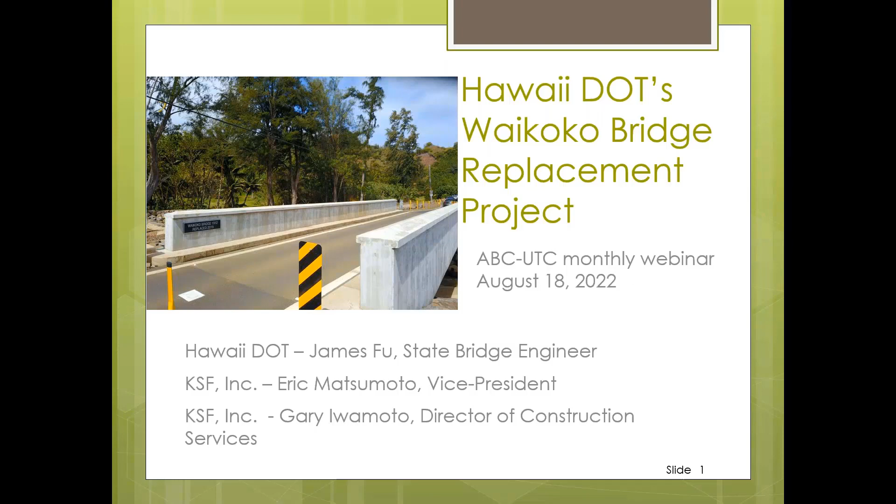Hawaii currently has about 1,360 bridges in the state. The average age of our bridges is nearly 70 years old. For your information, the Hawaii DOT Bridge Design Office is managing many programs in our state, such as the Bridge Seismic Retrofit Program. We are managing the Bridge Load Rating Program, where we must meet a federal mandate to load rate all of our bridges for SHVs by December 31st, 2022. We are also managing a Bridge Crash Testing Program, where we are crash testing our custom Hawaii bridge rails per MASH 2016.

We're also replacing many of our destination sign support structures. One of our main things we're doing is managing our Bridge Asset Management Program, where we must meet transportation asset management goals of 20% good bridges and 2% poor bridges. One of our critical tasks is to address critical bridge findings.

Hawaii has a unique situation from other states because our highways wrap around the island like this, and it's usually called a belt road system. For most cases, because of this belt road system, if a highway is closed for some reason, residents must use an alternate route, and most times they need to drive great distances to get to their destination.

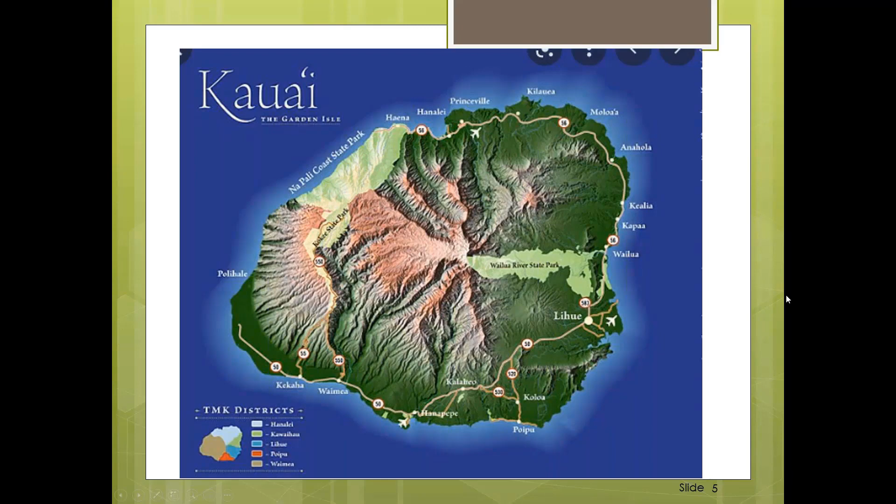Back in April 2018, there was a huge rainstorm on the north shore of Kauai. Heavy rains occurred between April 14th and 16th of 2018, which set a national record of 49.69 inches of rain in a 24-hour period of time. The previous Hawaii record was 38 inches. These heavy rains created many landslides on the north shore of Kauai, which closed the highway.

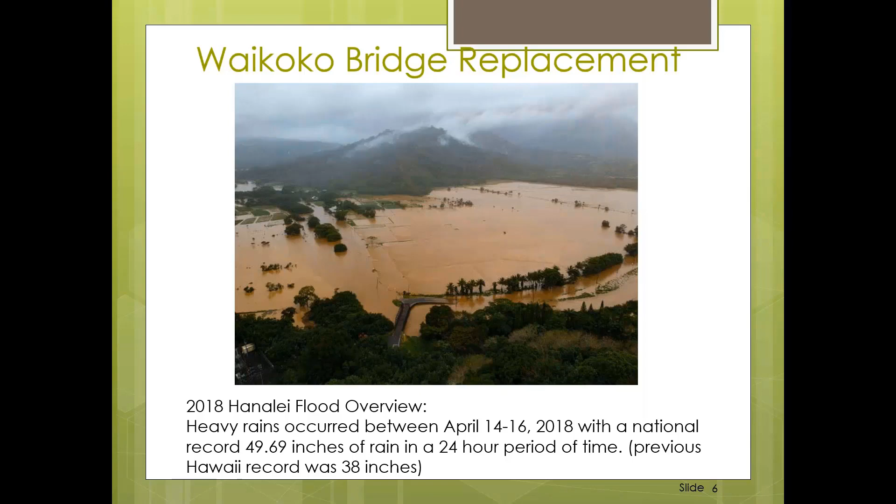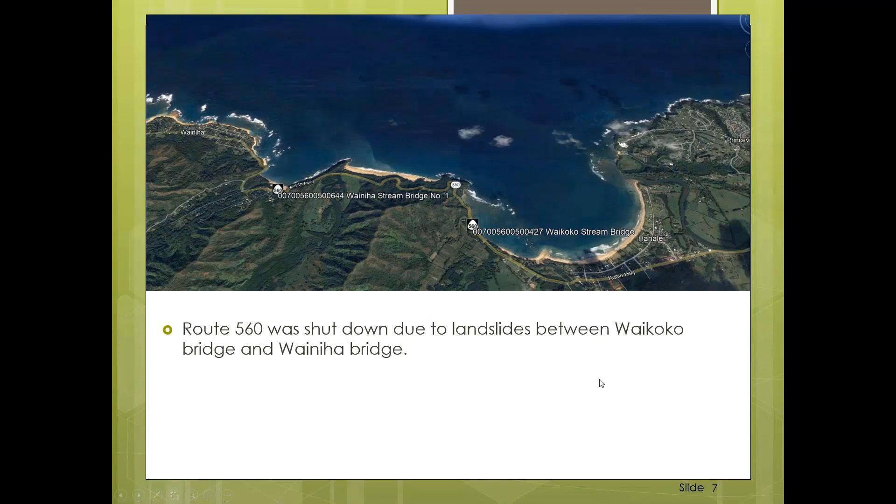Route 560 along here was shut down due to landslides between Waikoko and Wainiha. That's Wainiha there. As I mentioned, to get into this area, Route 560 is the only access to Wainiha and Haena.

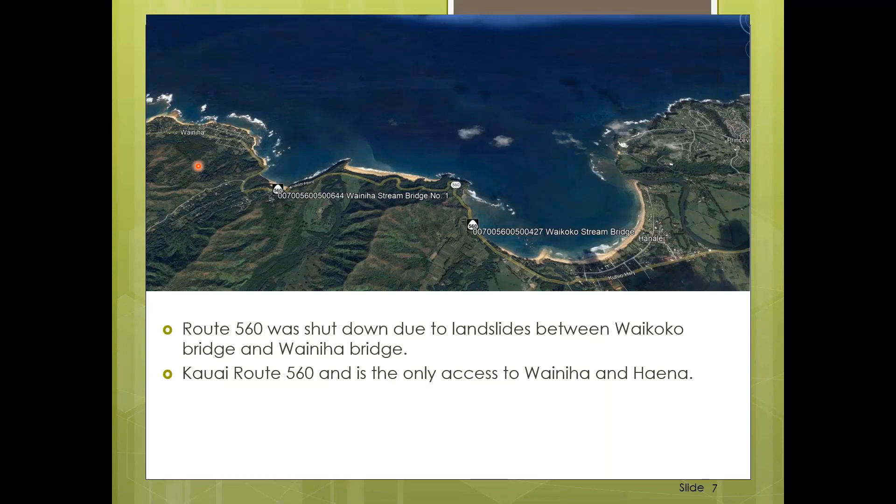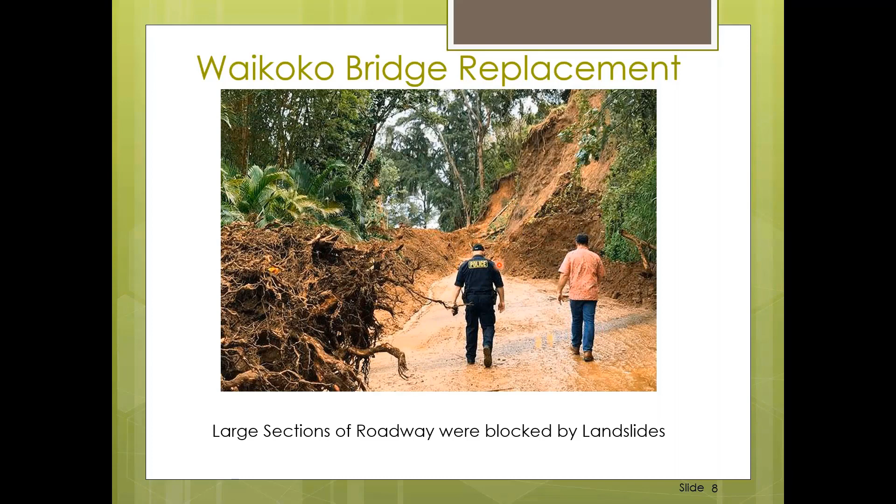Traffic was slowly opened to one-lane traffic after a few weeks. Here we're showing large sections of the roadway were blocked by multiple landslides, and large sections of Route 560 were literally washed away.

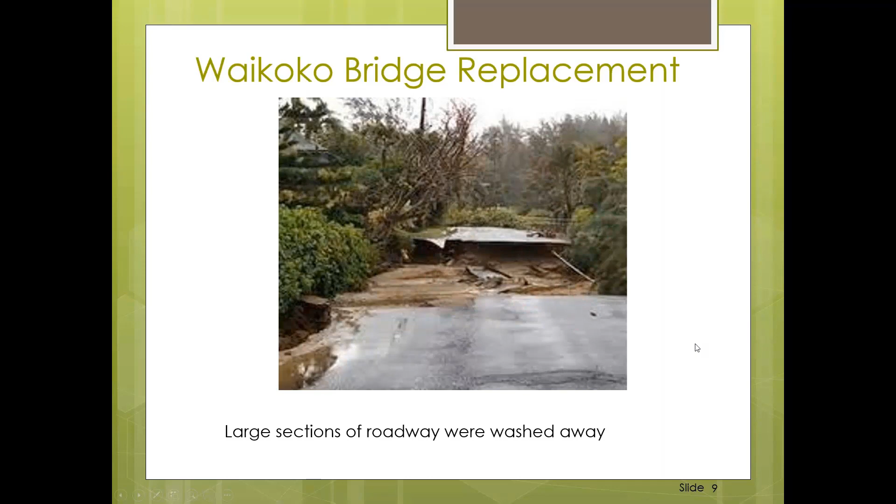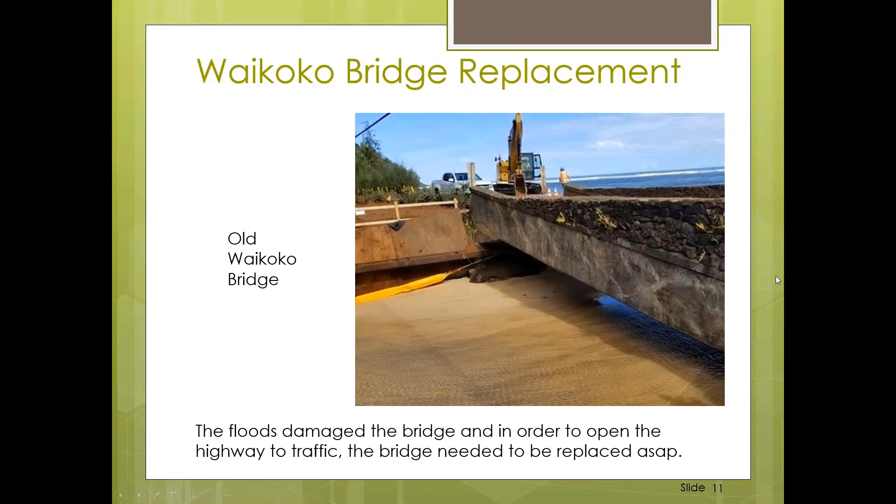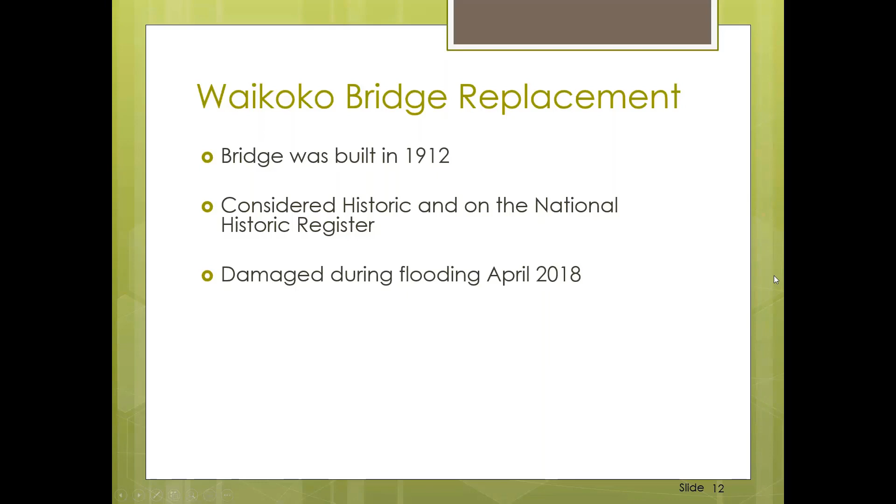The Waikoko Bridge was built in 1912. It is considered historic and on the National Historic Register. As I said, it was damaged during the flooding of April 2018. Hawaii DOT decided to replace the bridge after reviewing the option to construct it with a full highway closure for one weekend.

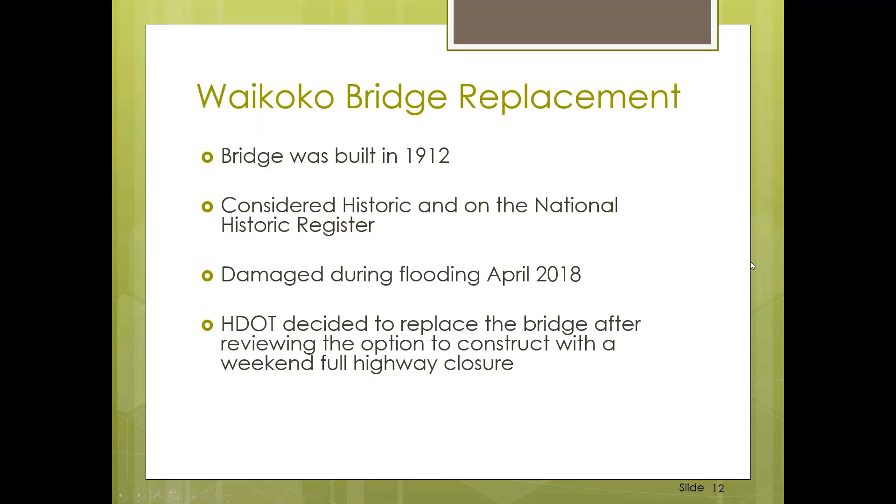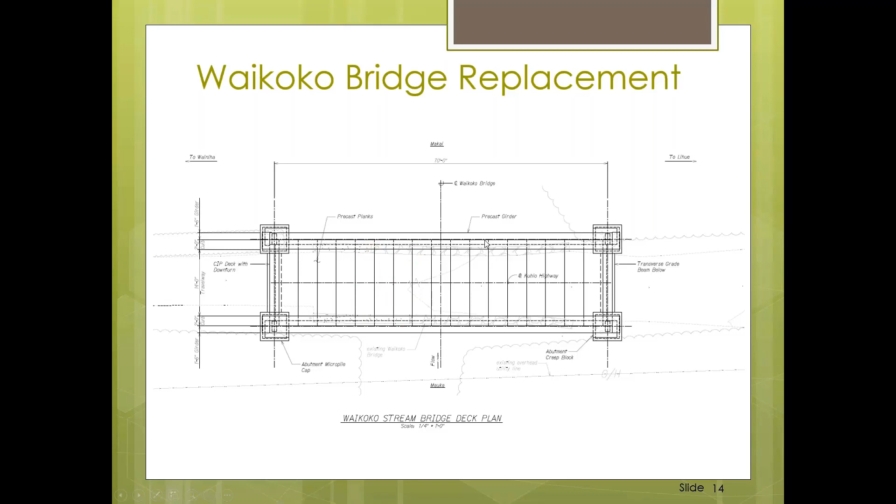This is a plan view of the replacement bridge. This bridge is a one-lane simple span bridge, and it's hard to see here, but it's 70 feet long. We'll go over the construction sequence later, but note that there were micropiles installed at the 4 corners of the bridge. The abutment pile caps were then connected with a transverse grade beam here and here to connect the two pile caps. The bridge girders were actually the bridge railings, and they were L-shaped, as I'll show you later. After the girders were placed, transverse precast concrete planks, shown here, were placed and supported by the bridge girders.

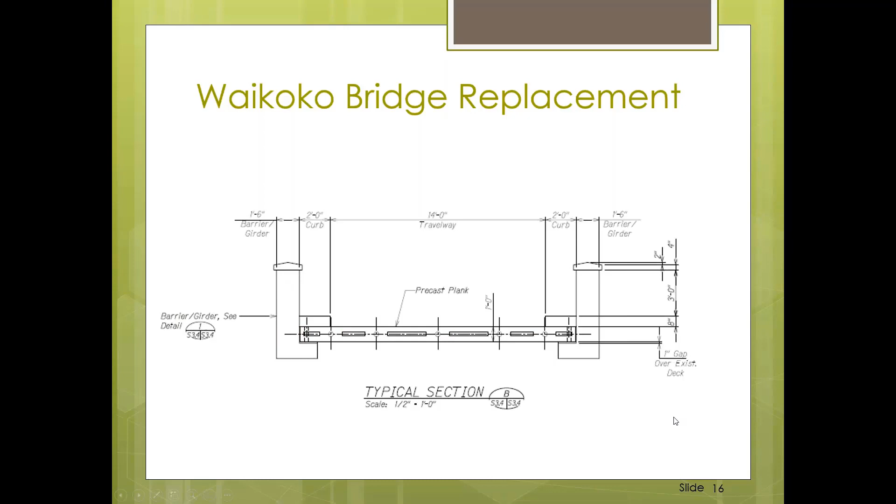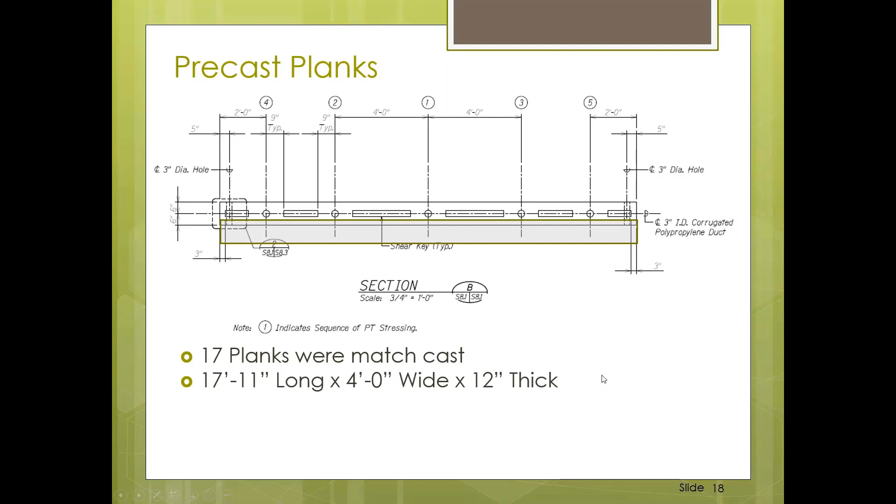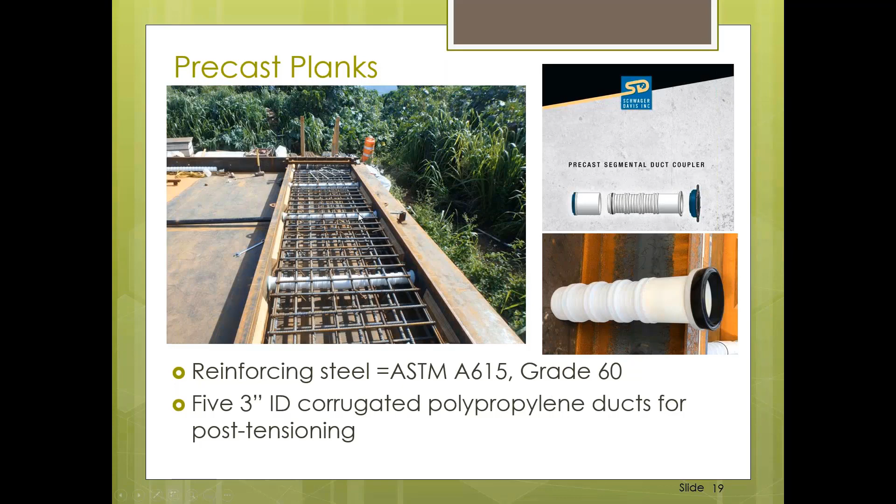The reinforcing steel for the precast planks were grade 60. There were 5 corrugated polypropylene ducts for the post-tensioning. As you can see here, the white tubes are the post-tensioning ducts. And then also at the ends of the plank were precast segmental duct couplers, which were used to help tie the planks together.

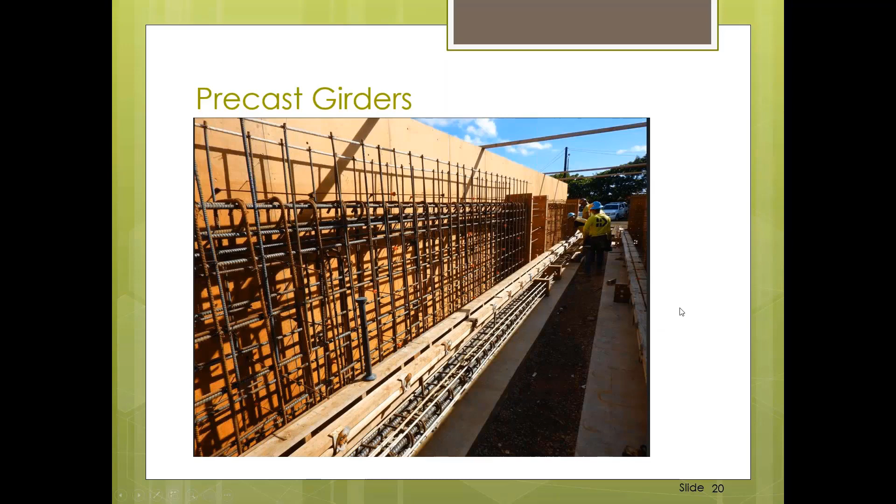Here's a picture of the reinforcing for the precast concrete girders. Note the L shape of the girders. Here's a picture of the completed girders. Again, note the L shape, which provides a ledge for the precast planks.

Due to hauling considerations, the precast girders needed to be spliced. Here's a picture of the closure joint used to join two segments of the bridge girder.

I will now go over the construction sequence of the new bridge, and I'll go over all of this in the next few slides, so don't worry about reading this.

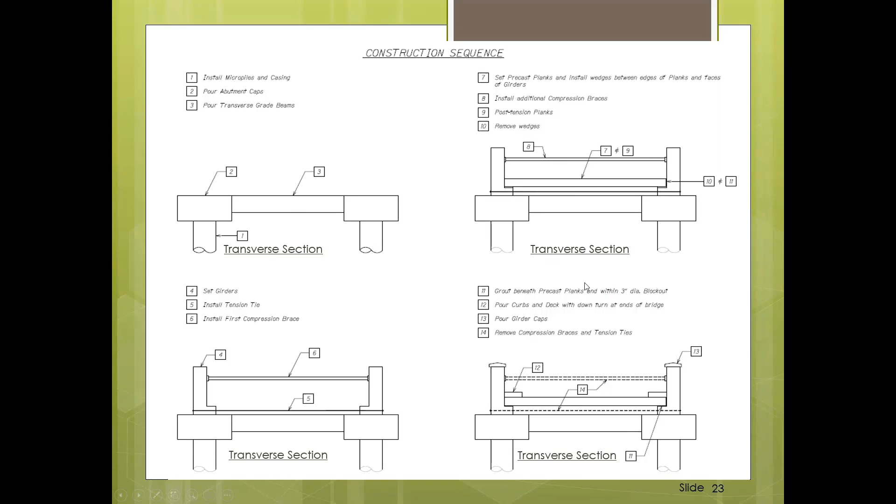Before the weekend closure, note that this is a transverse or cross-section look at the bridge. This could be the upstream, this could be the downstream. The bridge girders would run longitudinally, coming at us into and out of the page. So first, micropiles were installed. Then the abutment pile caps were poured. Then the transverse grade beams were installed to connect the two abutment pile caps. As mentioned, this is before the weekend closure.

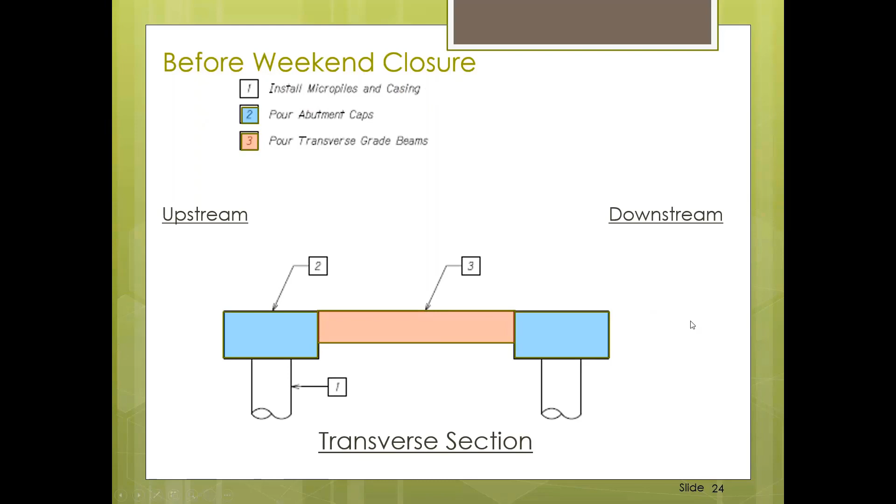As mentioned before, micropiles were installed at the four corners of the bridge. At this corner, you can see the drill rig being used to drill for the micropiles at that corner of the bridge.

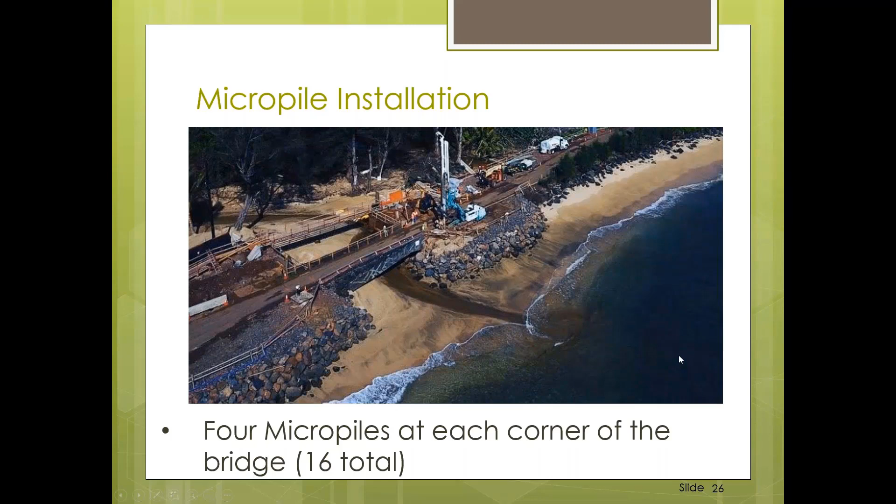Here's a picture of the abutment pile cap. Notice the existing bridge is right here—see the existing concrete bridge railing and the stone bridge railing of this existing bridge. After this concrete pile cap was poured, the concrete grade beam going this way would be poured to connect the two abutment pile caps.

So the micropiles, the pile caps, and the transverse grade beams were installed before the 3-day full highway closure.

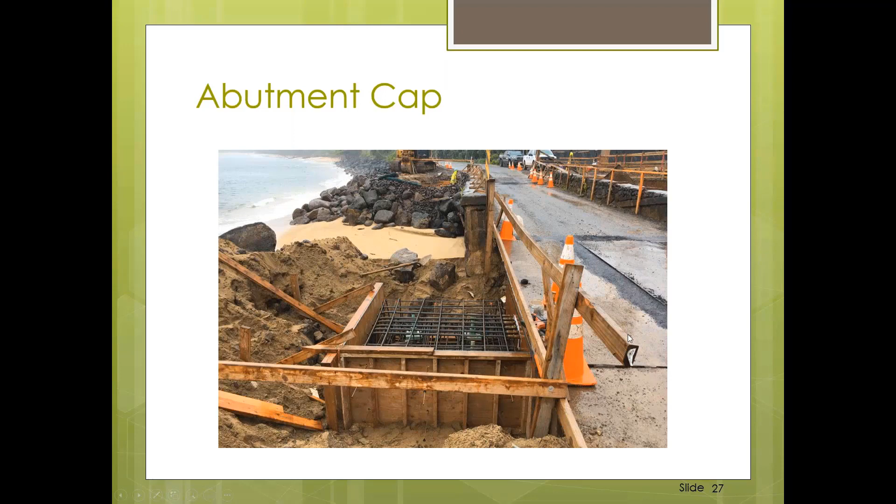During the 3-day weekend closure, the precast girders were placed, the L-shaped girders. Then temporary tension ties were installed near the bottom of the precast girders. Then temporary compression braces were installed near the top of the bridge girders.

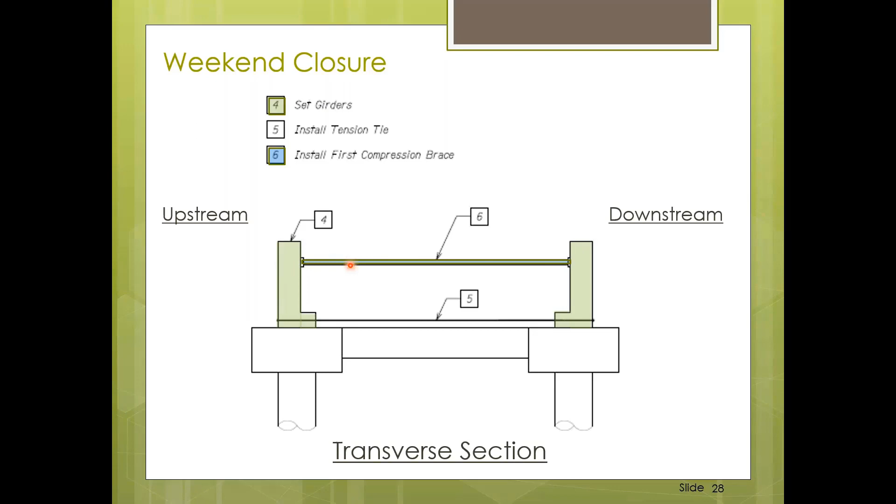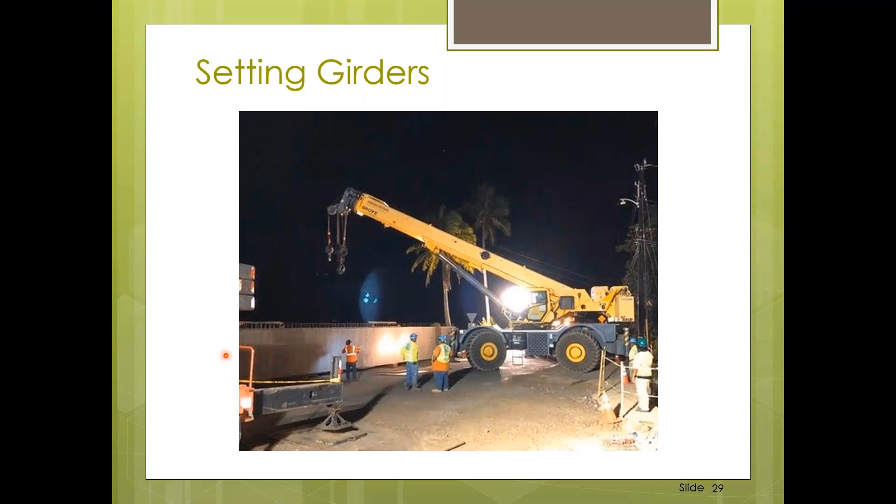Here's a picture of the contractor setting the precast girder, which is right here. Again, here's a picture of the contractor setting the precast girder. Note the L shape of the bridge girder.

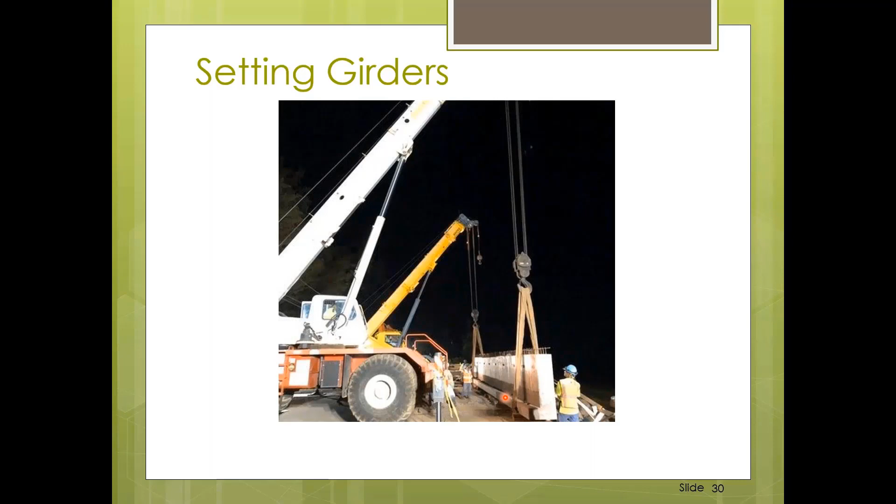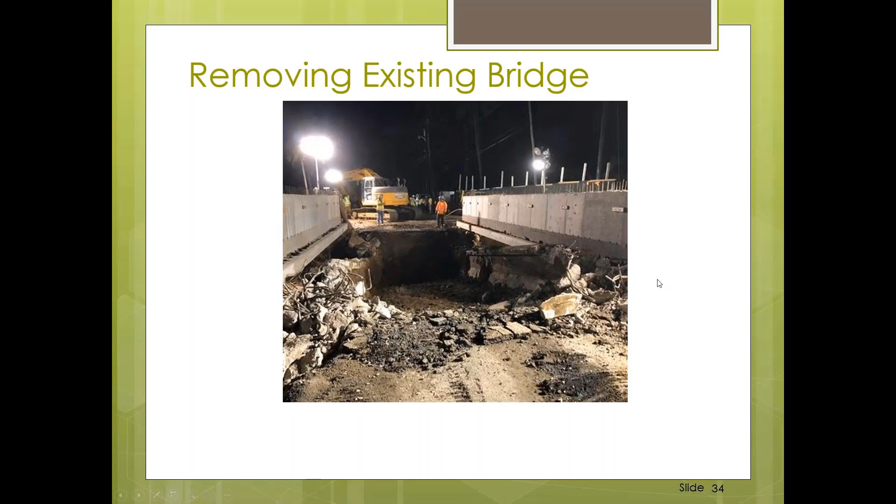This is another picture of the removal of the existing bridge here, and note the bridge railings are here. Here is a picture after the existing bridge was removed and the girders are already set in place.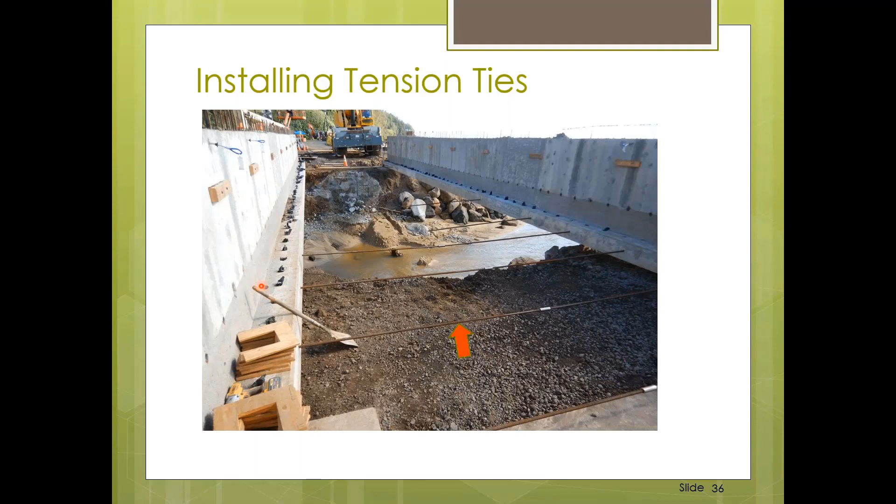Here's a picture showing all the temporary tension ties have been installed here. The tension ties are all installed. Now the first compression strut, this timber compression strut, is placed here against the bridge railings. And here, the contractor is setting the first precast plank.

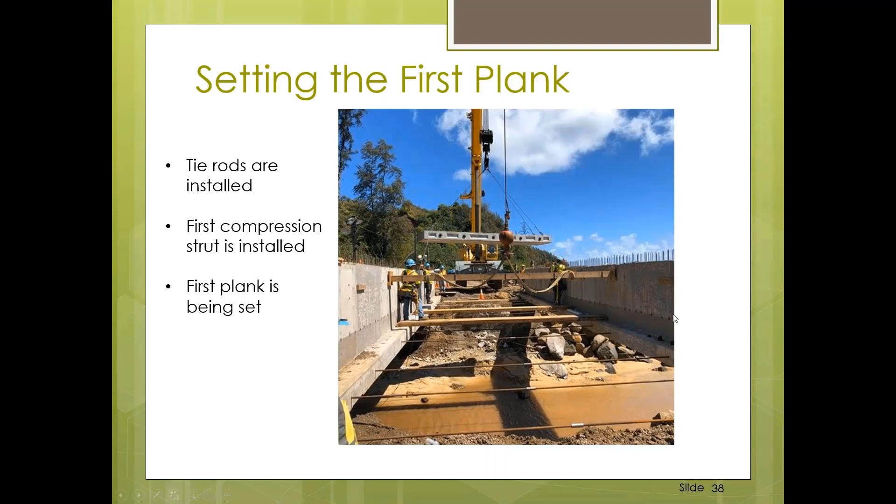After the tension ties were installed, the precast planks were installed. Wedges were installed between the edges of the precast planks and the face of the girders, to ensure intimate contact between the precast planks and the bridge girders. Then additional compression struts were placed. Then the precast planks were post-tensioned longitudinally, and once post-tensioned, the wedges were removed.

Here's a picture of the precast planks. Note the post-tension ducts here, typical post-tension ducts that would tie the planks together longitudinally.

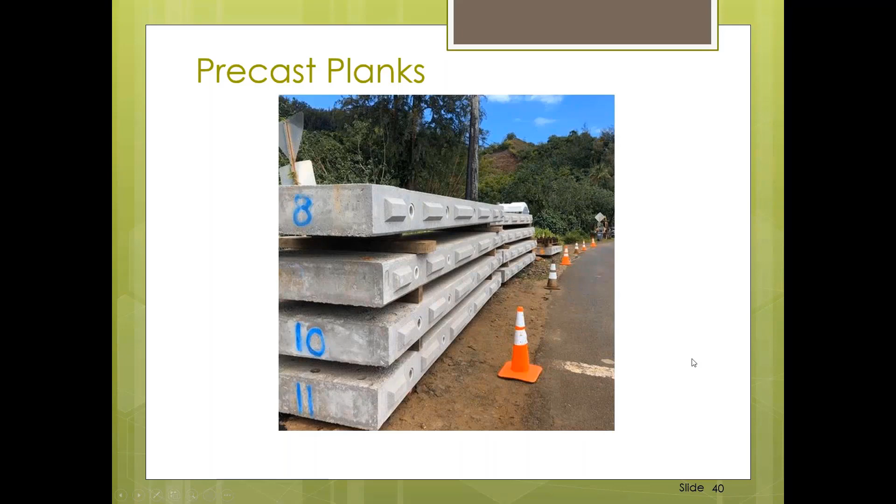Here's a picture of the typical post-tension duct coupler. The intent is that when the transverse planks are placed, the post-tension duct couplers would again help lock the planks together.

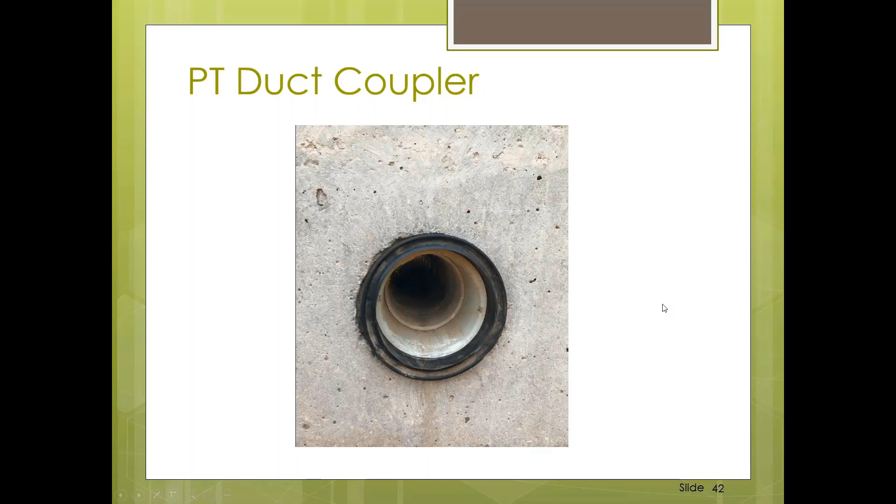Here's a picture from under the planks. Note the tension ties here, and this is the precast plank. Note the post-tension duct couplers here. Although it's hard to see, if you look close enough, you can see that the epoxy is on the coating between the planks.

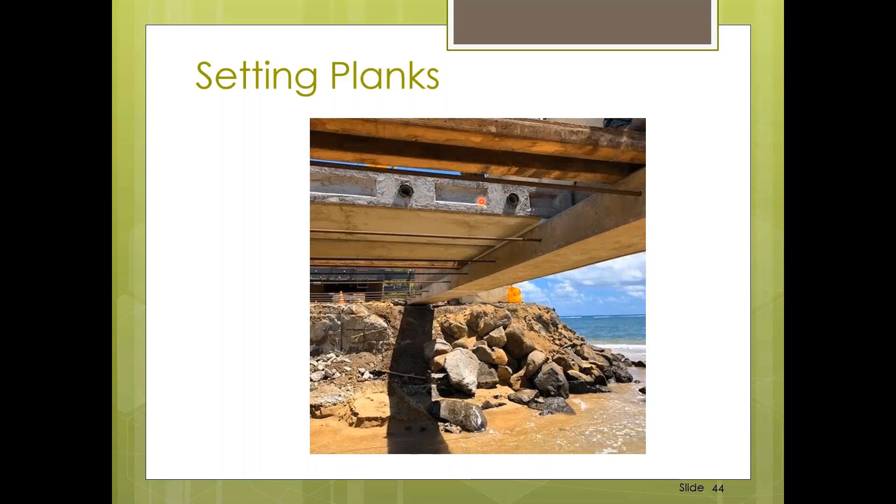Here's a picture of all the precast planks in place.

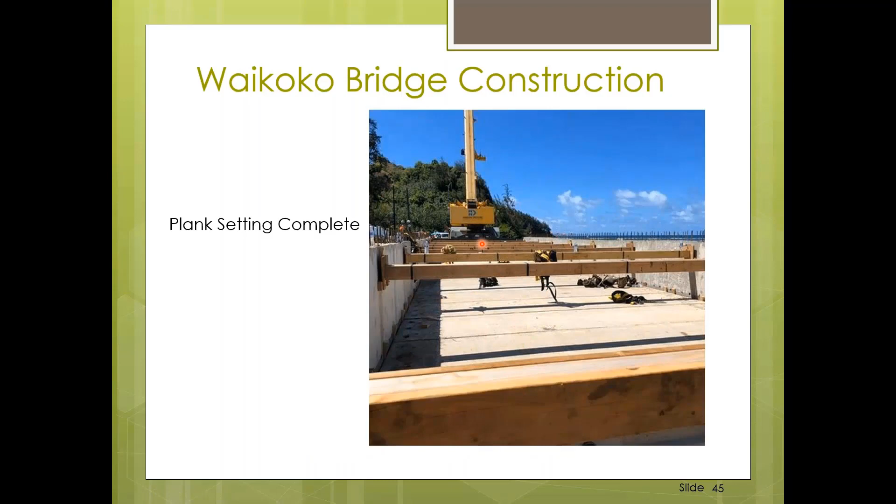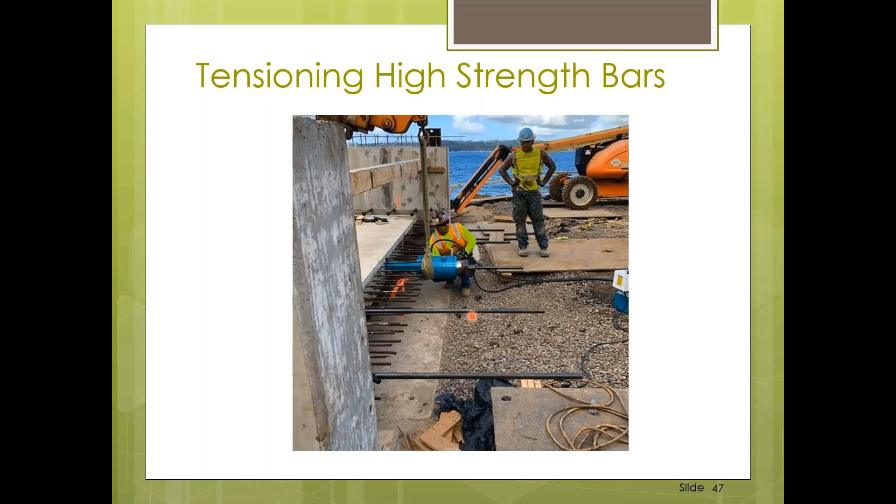Here's a picture of the workers installing high-strength bars through the post-tension ducts. Again, these are the workers, and now they're stressing the high-strength bars. Notice the 5 high-strength bars, 1, 2, 3, 4, and 5. The post-tensioning would squeeze all the planks together. After the workers stress the high-strength bars, you can see the epoxy oozing out from the top of the deck.

Next, grout was placed beneath the precast planks and within the 3-inch diameter blockout. Next, concrete curbs were installed with downturns at the end of the bridge. Next, girder caps were installed. And finally, the compression struts and the tension ties were removed.

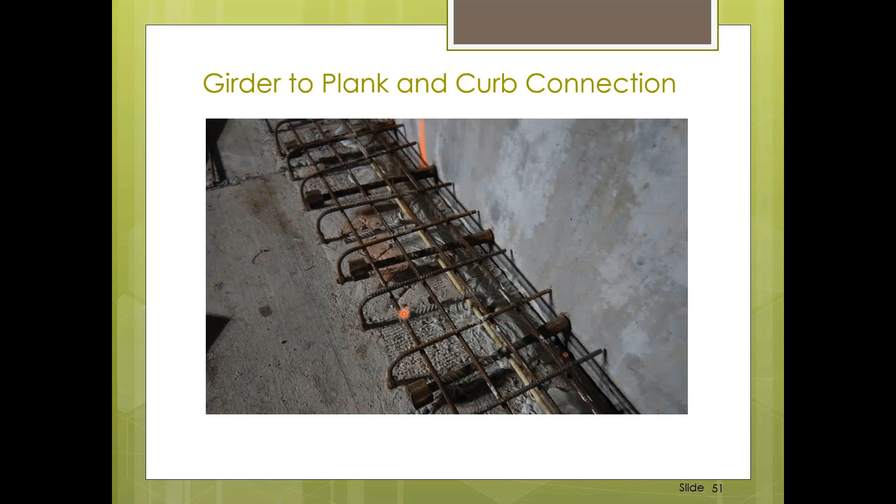Here's a picture of all those dowels in the concrete curb. And here's a picture of the workers placing concrete for the concrete curb.

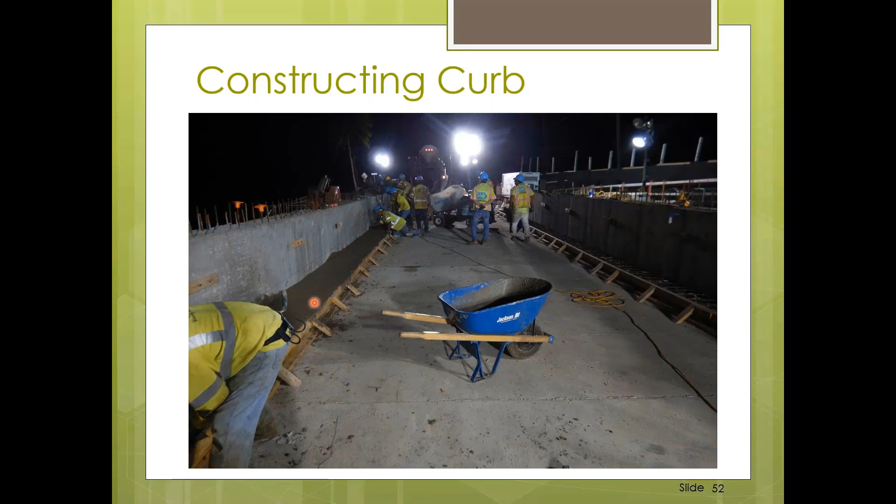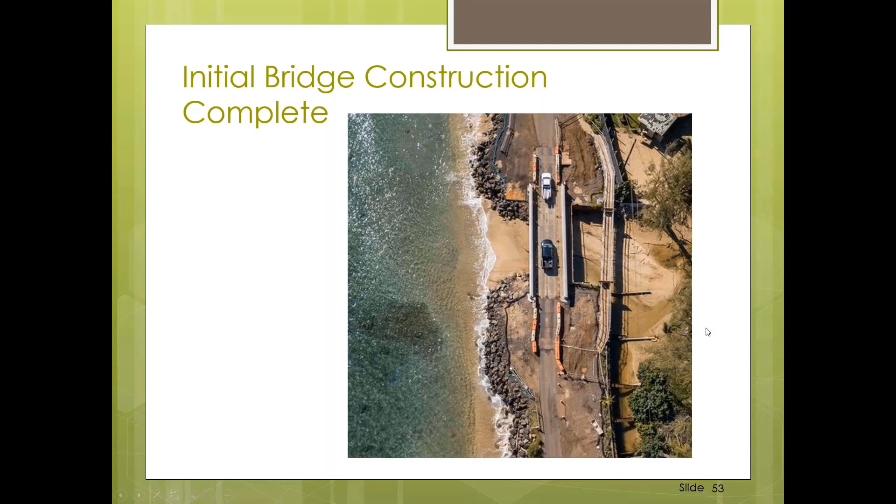So after the cast-in-place curb was installed and the temporary compression struts and tension ties were removed, the bridge was ready to be open for traffic. The Waikoko Bridge was open to traffic on June 16, 2019.

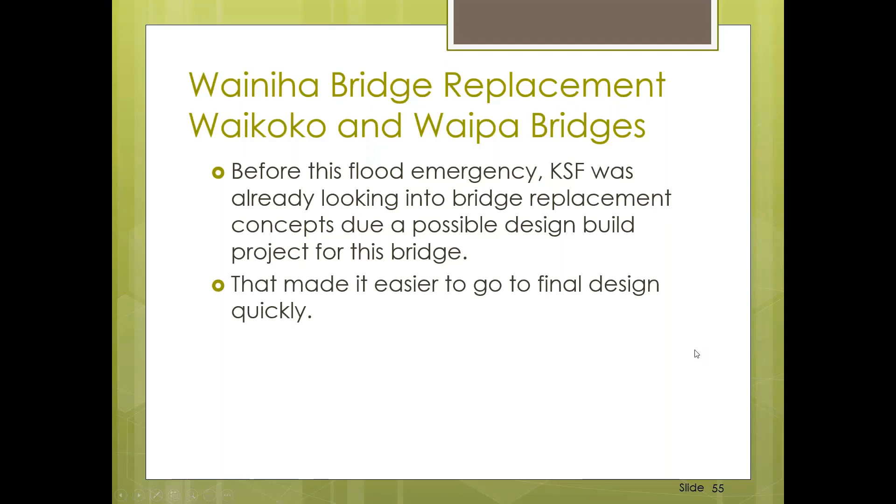Before this flood emergency, the designer, KSF, was already looking into bridge replacement concepts due to a possible design-build project for the bridge, as you can notice with the sunken bridge railings shown. That made it easier to go to final design very quickly.

Also, the state of Hawaii issued a state emergency procurement for this project, and the contractor and we had resources to do the work, and we could proceed as soon as plans were available and material was procured.

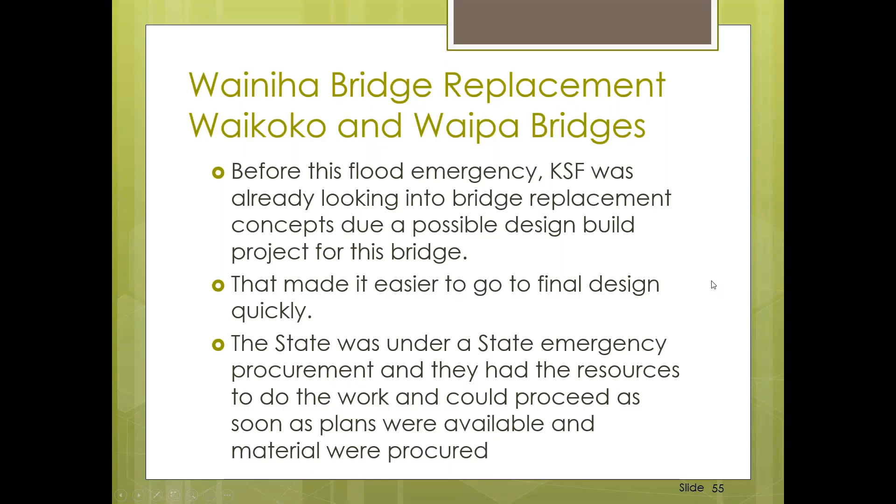We're now going to show a short, about 2 minutes long, time-lapse photography of the 3-day weekend closure. Gary Iwamoto, Director of Construction Services of KSF, will jump in and show you what happened.

Okay, so starting at 8 o'clock on Friday night, they started setting the girders, and then started excavating out the old bridge.

And once that was complete, they moved in to start setting the planks, and that continued until all the planks were set.

And once the planks were all set, the post-tensioning operation took place, and the grouting of the ducts.

And then the curb work and the railing cap work was done, and basically that completed the primary work on the bridge.

Once that was complete, the work on the ramps, the temporary ramps, and the end-post protection devices were installed, to get ready for the bridge opening once everything was cured out.

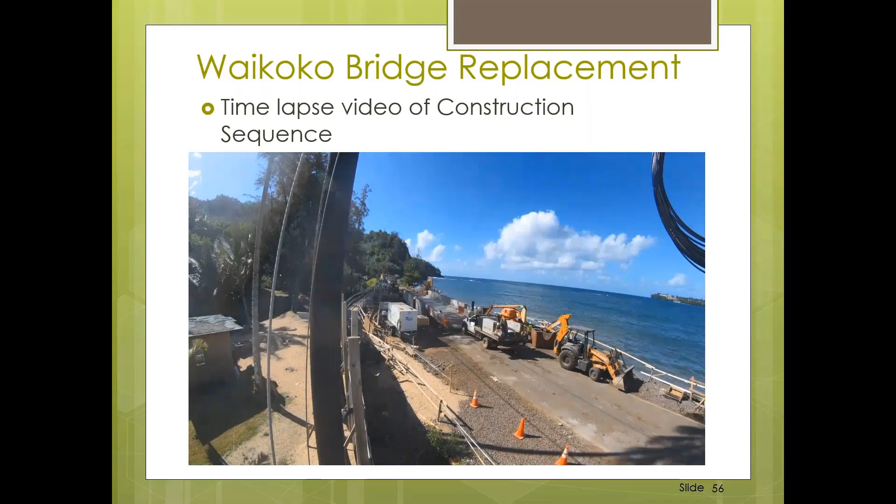This entire process took about 56 hours, from Friday at 8 p.m. to Monday morning at 4 a.m.

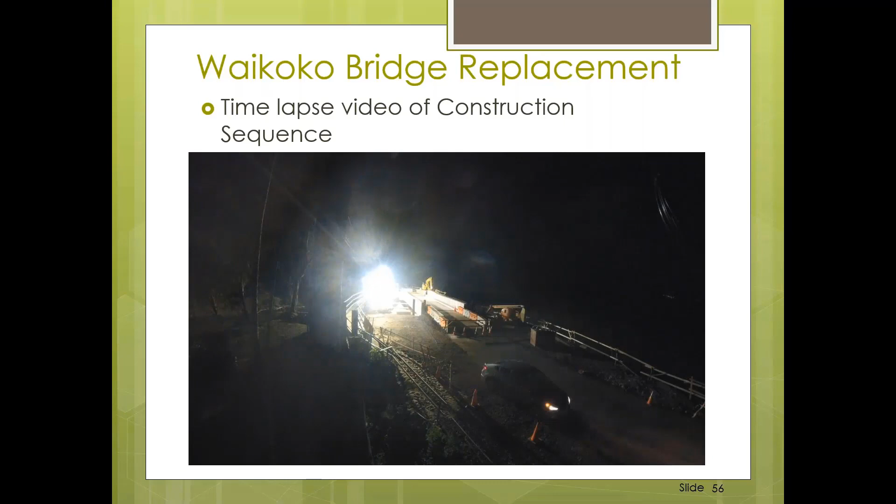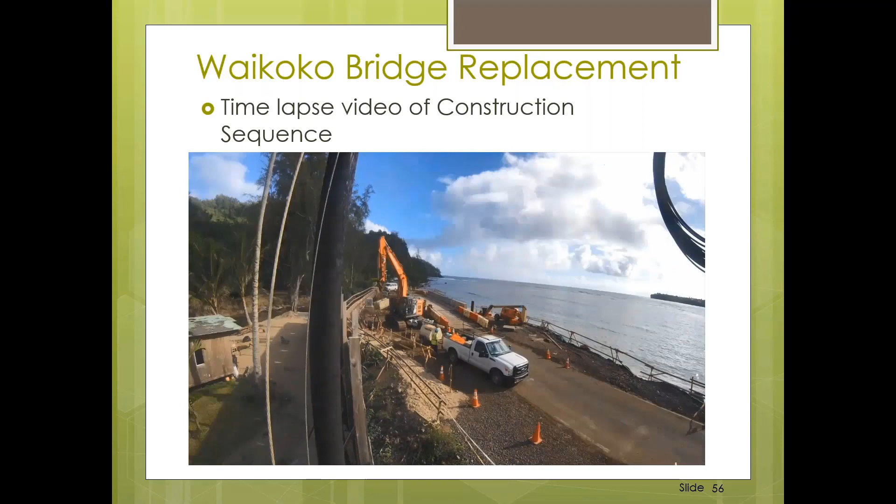And once everything was cured and cleaned up, at about 4 a.m. in the morning, traffic was allowed to cross the bridge, and then work continued to restore the entire site and to install a permanent roadway and relocate all the utilities that were previously relocated to allow this work to continue.

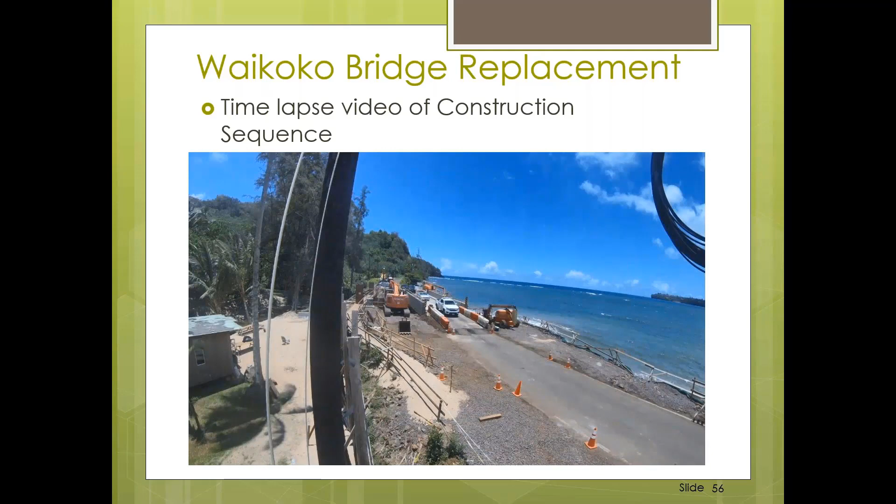Okay, that basically wraps up our presentation. And if there are any questions.

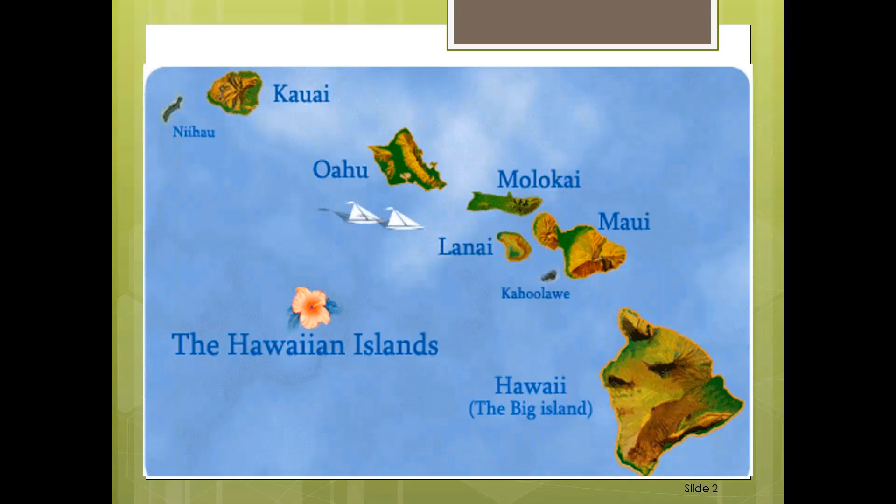Let's go on and look at some other questions. Here's one: on slide 22, why was such a large closure pour used for the girders? Well, for one thing, the girders—we have them coming in three pieces.

James showed you the casting yard, which was about 40 minutes away, so there are limitations on the transportation of these girders to the site, and the girder lengths or sizes were dictated by those limitations. For this closure pour, we did locate all of the splices, the couplers, for the contractor, so that he could pour it without too much congestion. The 4-foot splices were based on those factors.

Now you use the 6,000 psi concrete in the closure pour? Yes, we had 6,000 psi concrete with corrosion inhibitor and SRA.

After the girder pieces were transported to the site, close to the bridge, it was spliced, but it wasn't spliced in place, it was close to the bridge in close proximity. Once it was closed, then it was ready to be picked and placed into its position along the existing structure.

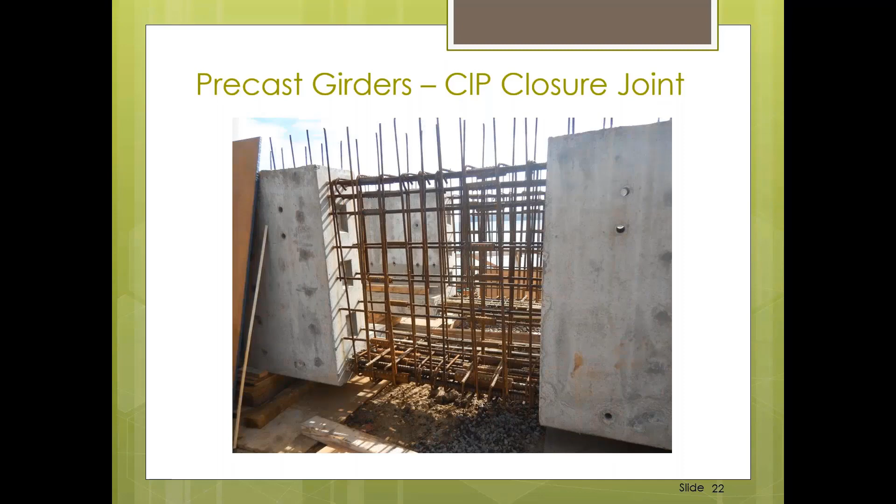Okay, we had a question that came in. Was the casting facility, since you're talking about the closure pour, but was the casting facility for casting the beams an existing facility, or was it created specifically for the project? It was created special for the project, and the site was selected because it was readily available for the contractor.

Now we had a question here that came in during the presentation about the tension ties, and were they part of the permanent structure, or if so, were they galvanized or made out of stainless steel? If this is pertaining to the rods that were placed on the bottom, those were temporary ties.

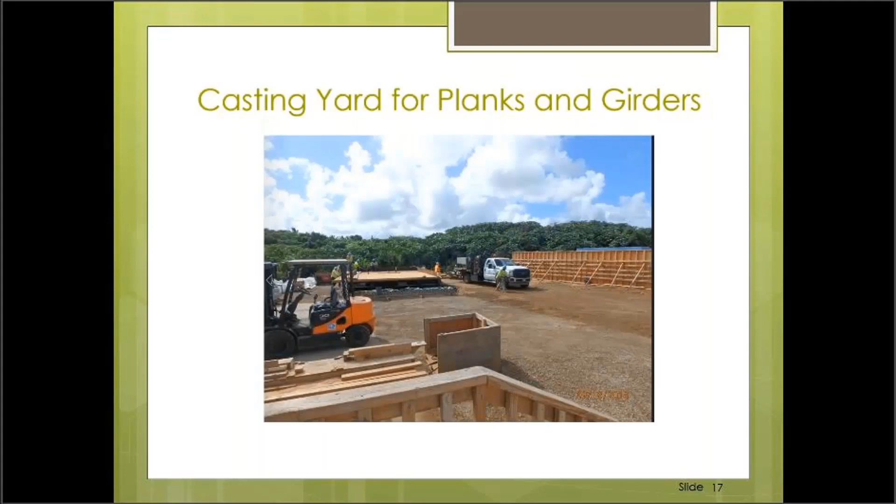For the girder, it's an L shape. So when we're placing the planks, there's an eccentric load, so the girder wants to turn in towards the roadway. That's why we had the compression struts at the top and the tension ties at the bottom of that ledge, or in that ledge. So if it wants to turn this way, the couple would help resist it. Okay, but those were temporary, you said. Temporary, yes.

The next question we have, this came in during your before your presentation, was corrosion resistant rebar considered or used in the project? It looked like regular black bar. I think y'all mentioned that early. It is regular black bar.

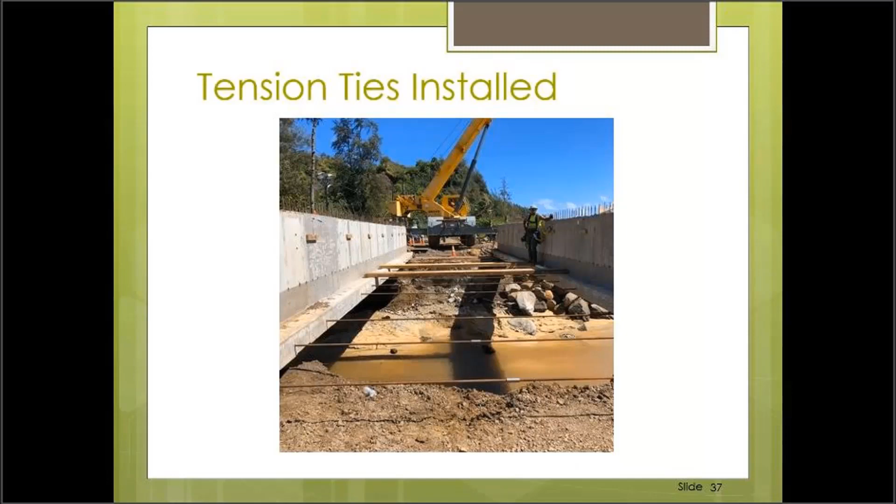We would actually have wanted to use the A1035, otherwise known as the ChromX, with the 9% chromium. However, we couldn't get it in time, so we did proceed with the black bar. We do have for the dowel that's coming out of the ledge of the girder into the plank, that is the 2205, the duplex stainless.

To address corrosion, we do have the Cortec, or the corrosion inhibitor, in all of our concrete, and we also have a low water cement ratio. We specified 0.4 water cement ratio max. However, it did come in lower than that.

Were there any other provisions incorporated to address corrosion? You mentioned some corrosion inhibitors. Yes, we did use the Cortec MCI in our concrete. We also included it in the grout for the post-tensioning that surrounds the post-tensioning rod within the duct.

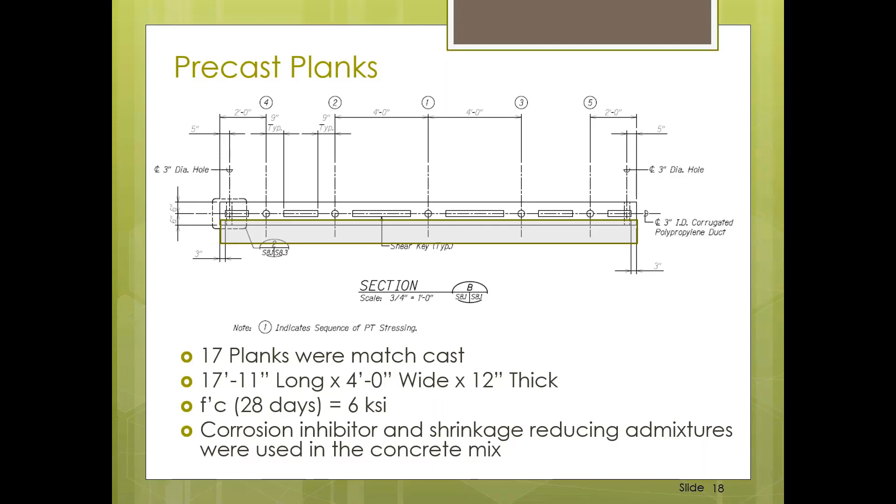The next question, the final question in the design section, is Hawaii DOT considering more ABC projects given the small outdated bridges on the islands? They mentioned Haleiwa, I can't pronounce it. So we're looking at a slide-in bridge that's going to be happening in another couple months, and we're looking more at ABC type bridges to replace existing bridges because the state DOT wants to minimize or eliminate temporary bypass roads, because you need to encumber right of way, and it's very difficult to get those areas to put in temporary bridges. So we're looking more and more for weekend type closures to install new bridges. And like I said, we'll be doing one in a couple months, which is a slide in.

Okay, let's look at some construction questions. We've got a bunch more questions that have come in once we started the question and answers, so we'll try and move along. What was the biggest engineering challenge the contractor had to overcome that wasn't designed by the engineer of record?

Any thoughts on that? I think most of the engineering challenges were designed into the project with lighter sections or lighter pieces to be put together on site, and that could be handled with equipment that we could strip down and get over the existing bridges, because there's a 15-ton weight limit for most of the bridges coming in. But the biggest challenge really was dealing with heavy pieces of precast in a very short period of time that we had.

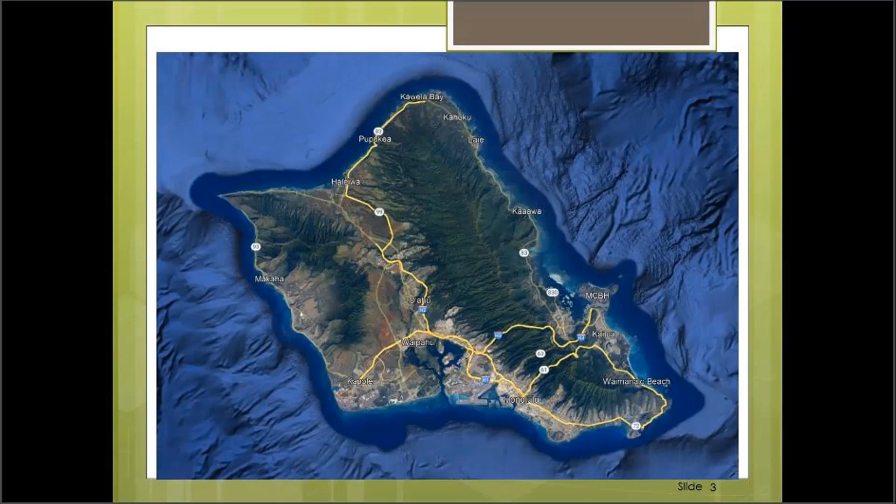There was another question along that same line about the setting time of the epoxy between the planks. We had 8 hours from the time we applied it to post-tensioning, and it was well within that period.

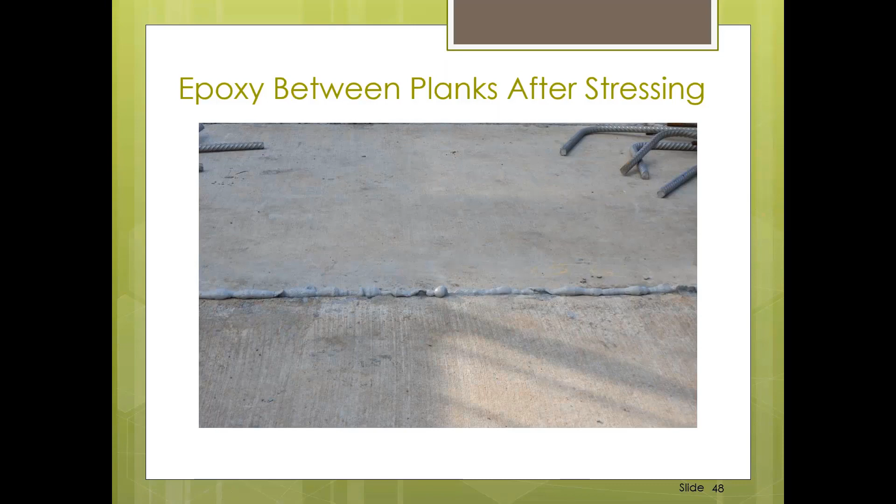I got a question here about the tension ties, that was the one we asked about the permanent structure. Let's go to a cost question: what were the temporary bypass costs and benefits for the project? I don't think you really ran a temporary bypass, did you? Didn't you run the traffic over the existing bridge? We did not.

There was a CFL project that was going to put in a temporary bypass road. That temporary bypass was estimated at between 10 and 15 million to go upstream of the existing bridge. That work wasn't done, but it was quite involved because you had a number of issues related to drainage coming in on both sides of that upstream area, from both the left and right side.

This bridge itself ended up costing somewhere in the neighborhood of about 3 million. So that temporary bypass was eliminated, and for the cost of this weekend closure and some of the inconveniences that occurred that one weekend, the state was very pleased with the cost that was spent.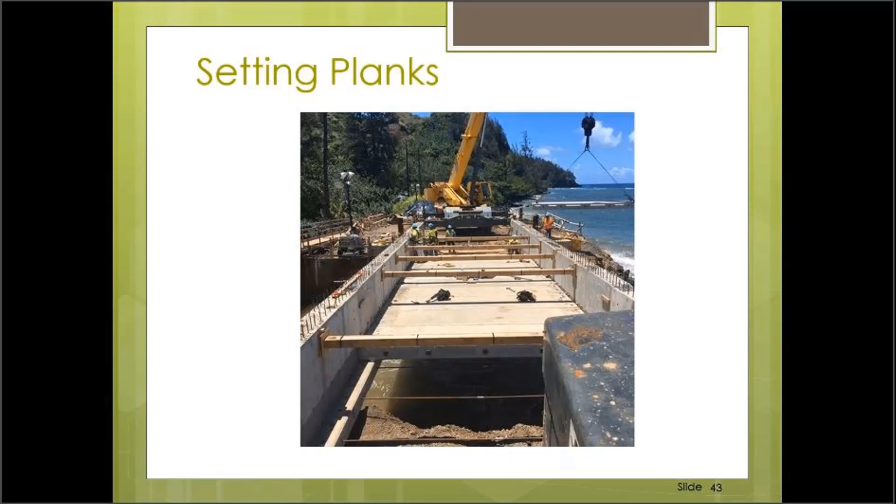Next question: what was the setting time of the epoxy between the panels? We had an 8-hour window.

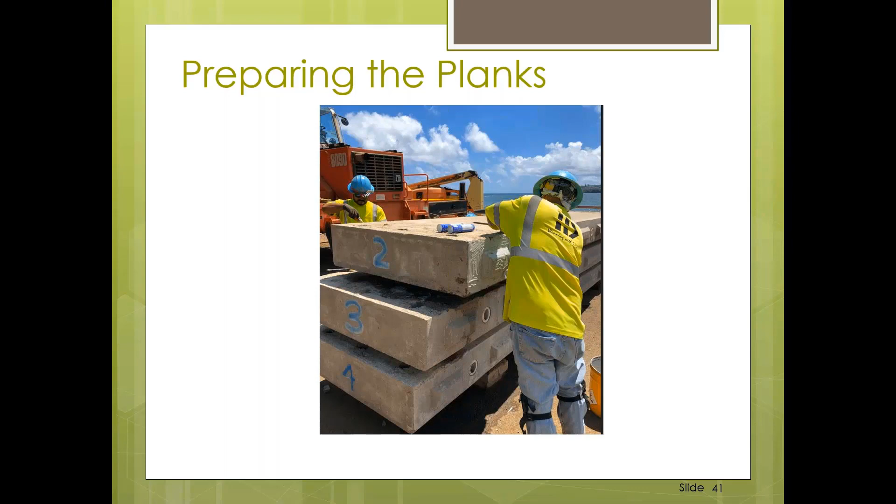Was there any specific type of high early strength concrete used for the curbs? I think I answered this earlier, but the high early grout was between the plank and the girder, and beneath the plank and the ledge. But for the curb, we did not use that. We did have corrosion inhibitor and shrinkage reducing admixture in the curb concrete, which was also 6,000 psi.

What is the ADT on the bridge? I've got to check that. I looked at the recent data, a couple years ago it was 3,300. But I looked this morning and it was 8,000. I've got to check into that, I can't see it being increased that much. I'm thinking it's more somewhere around 3,000.

Just a follow-up question on the epoxy, did you use normal or slow set epoxy? Slow set. Next question, what were the design considerations for the tension ties and compression struts?

How does the cast-in-place curb function to replace them? If we looked at the entire construction sequence, the initial phase would be setting the girders and then placing the planks on it. So when we place the planks, it wants to turn inwards towards the roadway. So the compression strut on the top and the tension tie on the bottom would help resist this overturning, with this couple for the compression strut and the tension tie.

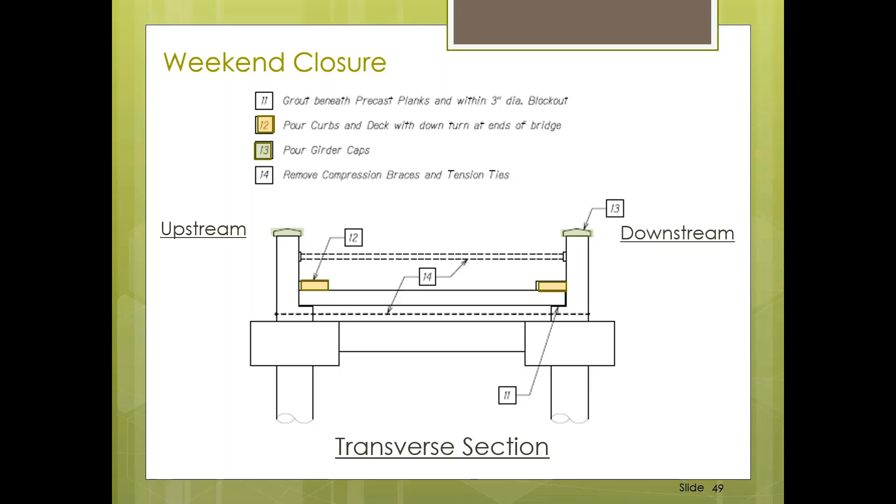If we look at just that juncture between the plank or the plank curb and ledge, there's that stainless steel dowel that goes from the ledge into the plank. It also extends into the curb, which has the resistance at the bottom. The curb and the top of the plank provide that, replacing the compression strut or the wood that goes across the top.

How long did the whole bridge replacement take, and what were the lessons learned? The entire time it took was about 56 hours to complete the weekend closure.

I guess part of the lessons learned was that it could be done in a shorter period of time, although that would not allow for any kind of hiccup in the process. But I think the window that we asked for, and was provided, gave ample time for any kind of issues or problems that would arise.

This road was closed to traffic, and you have residents and emergency vehicles that need to access both sides, so that's why the pedestrian bridge was put in. But if you plan on opening earlier and you don't finish, it's going to cause quite an issue for everyone, and nobody's going to be happy if they have to sit there and wait.

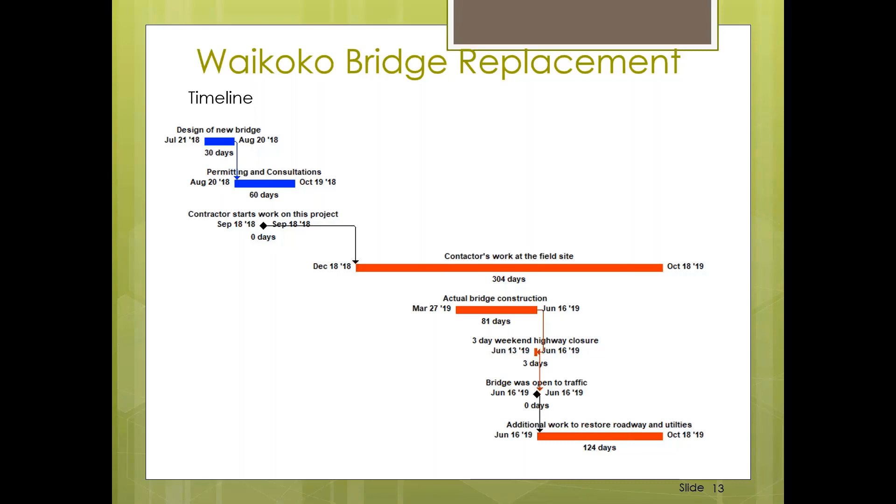Next question, were the PT ducts grouted? Yes, they were. Next question, what is the material infill for the micropile casings?

We did have a micropile grout in there. The 28-day compression strength was 4,000 psi, with a maximum water cement ratio of 0.36.

Next question, were approach slabs or joints used at each end of the new bridge? No, there are no approach slabs.

The planks supply eccentric loading to the girders, how do you make sure the whole structure is stable? I guess that's where the struts come in. It goes back to the whole construction process and the final tie-in with the curb. We did address this turning into the roadway, and that slide is applicable.

Next question, any idea about cost premium compared to a decked I-beam system? A deck and I-beam system was going to be very difficult to construct because we wouldn't have the freeboard, and this design allowed the maximum amount of freeboard for drainage. Also, trying to put in a girder bridge would require a pretty significant and long approach modification, because this bridge relies on line of sight for people to cross in the permanent condition, since it's a single lane bridge. So there was no cost comparison made to a girder bridge.

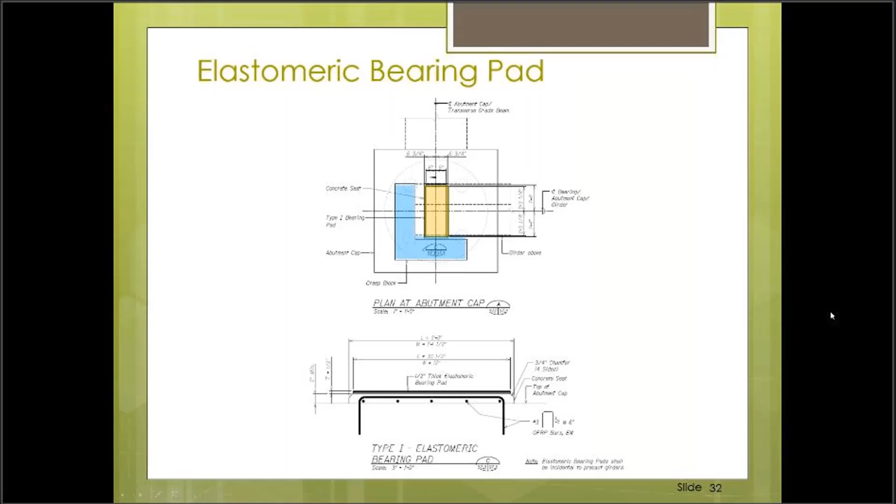Okay, thank you. Next question: why was this kind of bridge selected as a replacement structure versus box beam or some other type? Basically because we wanted to get the largest opening that we could to allow for any kind of storm flow, and this allowed the greatest freeboard.

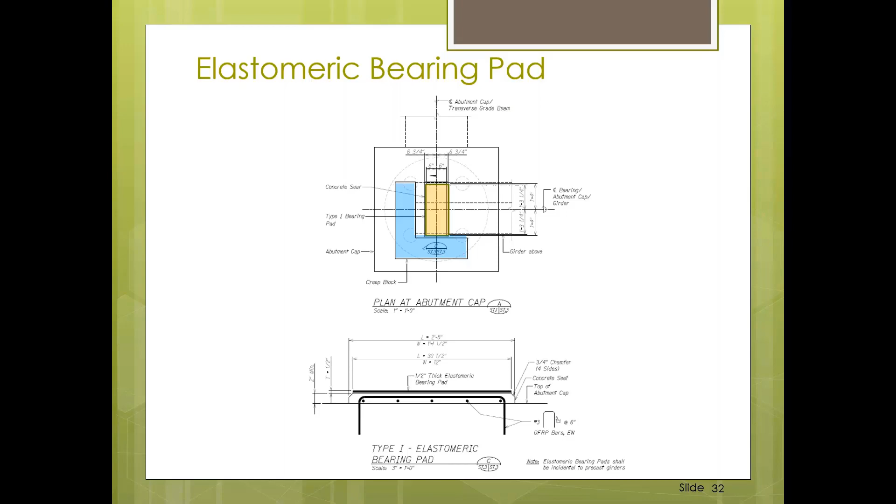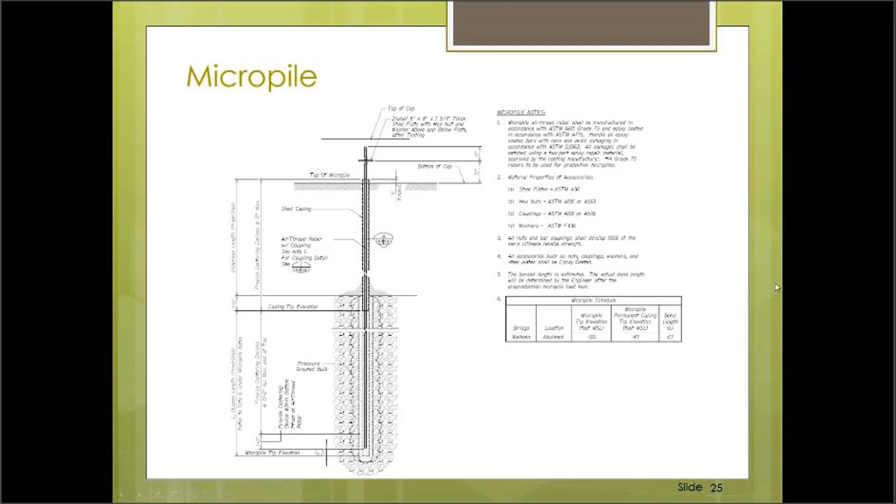Okay, thank you. Next question: did you have any issues with the use of micropiles, or were they just selected due to ease of installation? It was chosen because that was almost the biggest size rig we could get into the area to do the work. A drill shaft rig or a pile driving rig - the weights on those machines were prohibitive and could not get into the site.

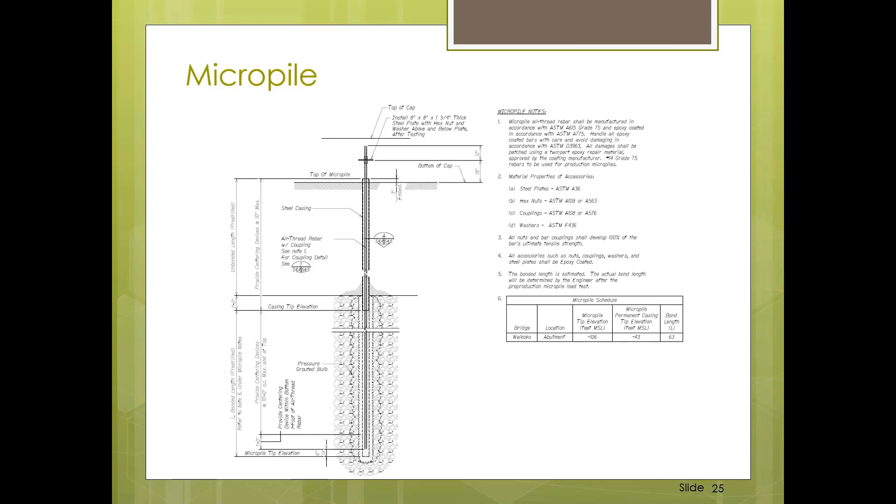Next question: weren't the wedges an actual impediment to fully filling with concrete the gap between the plank and the girders? The wedges were removed at that point, so that the grout could be easily placed.

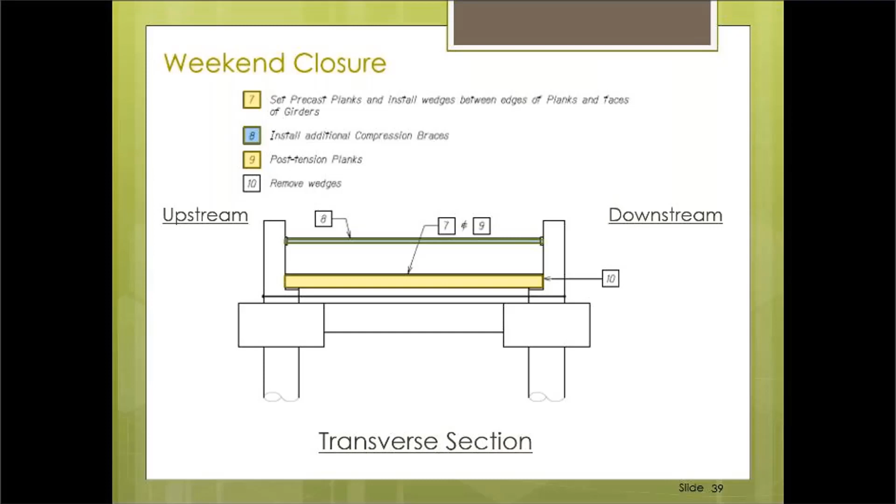Next question: were there any big trucks expected to pass this bridge? After the bridge was completed, there were some larger vehicles that were allowed to pass on a limited basis - tandems at the largest size, regular highway tandems.